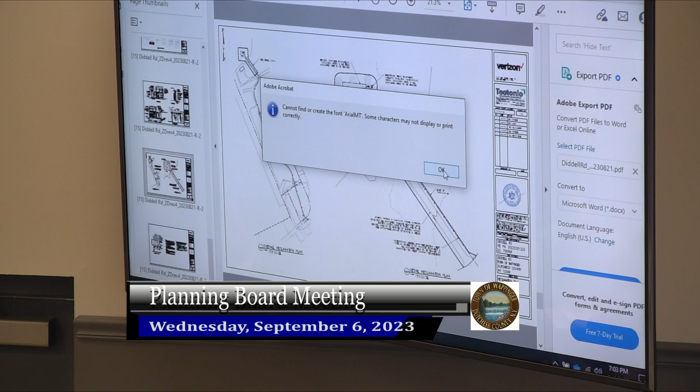So we've included those on the plans, which I'm having trouble finding, but it would be at the top of the tower. This is just some information from Flash Technology that shows you the beam and how it's projected outward. It's an FAA-approved light, and if it is required, that is something that we would use.

But I wanted to bring it to your attention because I think it complicates things a little bit, because under your code, the maximum height of a tower is that which can be operated without an FAA light. So we would probably have to go to the ZBA for a variance for that, again, if it was required.

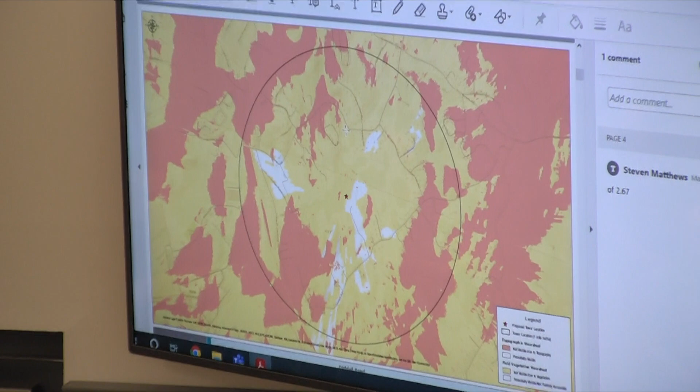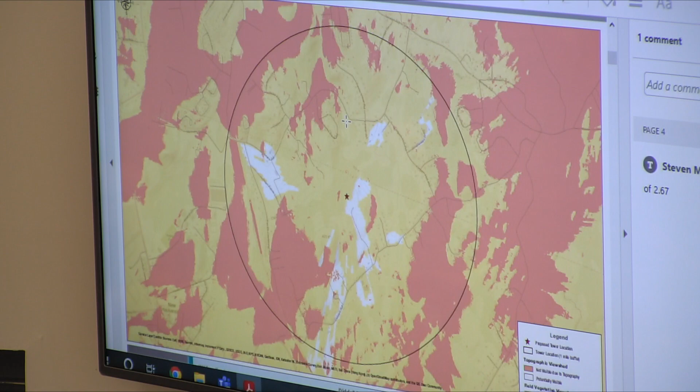The areas that are red and/or yellowish are areas that are screened by topography and/or vegetation. Obviously there's more screening in the summer months and less in the winter, but here we showed you what the leaf-off condition was. So this is more of a worst case type of scenario that we showed.

Okay. All right, any of the board members have any questions regarding this application? Not yet, no. Okay, all right.

Okay John, did you have anything with this one? No, they had addressed all our comments regarding the site layout. If the site does indeed change, we may have to relook at a couple of things, but okay.

All right, Jim, you have nothing right now? No, not... All right, okay, so this is an adjourned public hearing. I guess at this point, let's open up the floor for public comment, and then we'll go from there.

The only thing I would add is I think things are going to be adjourned further. We did the shot clock extension, I believe October 16th. We would just like to extend it further while we do this - if I could put a letter together like I did before, I could put it out until November, December, something like that. Yeah, that'd be great. Thank you, just administratively I want to make sure we don't run afoul of that.

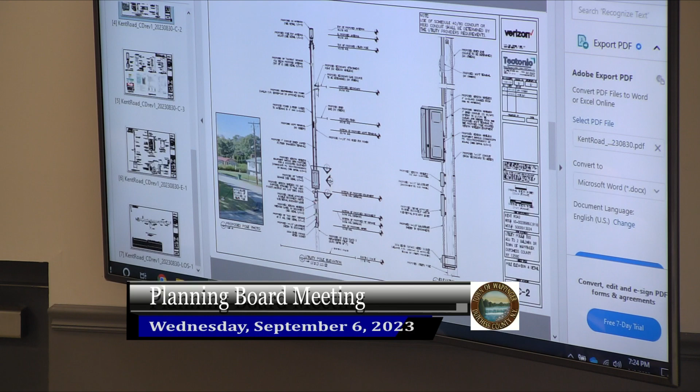So this is, I think, the easiest one we have for tonight. We submitted some revised plans. The only revision we did was to address, I forget which comment it was - the sight distance, the line of sight. So we did do that. It's the last plan, or second to last one here. So that's provided, I don't know that you can see it because I can't see it, but...

Sorry. Overall, this one has some pretty good sight distance. Sorry for whatever I just did. So that was like, I think, one of the biggest comments that was there. Weren't too many other comments. We tried to address that. Overall, we think it fits in with the surrounding network of utilities that you have. I don't think there are any major concerns with it other than the line of sight distance.

Well, first I'll start with the board. Does anybody on the board have any concerns with this application that haven't been addressed? No. Okay.

Malcolm, have you any open issues with this? No, currently I have no open issues. We spoke with the RF analyst earlier today. He also has no open issues with this application. There are no red flags in his report.

Okay, John? This was the one comment we had regarding this application, the line of sight. We just got the submission this evening, so I'll take a look at it tomorrow just to verify. But it looks like they provided what we asked for.

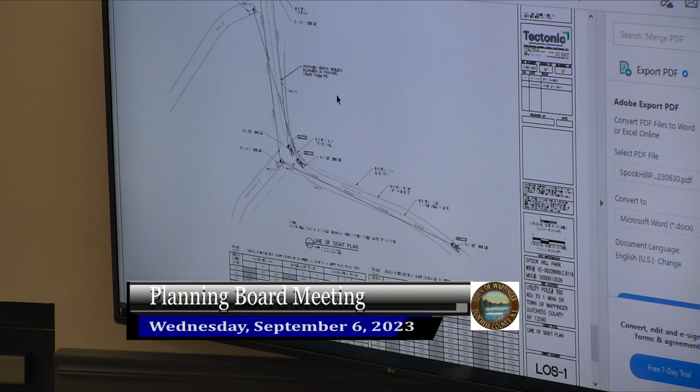That's what a lot of people said, they didn't want the pole to be there, so we can move it there. Should not be a problem for us at all. And we provided a line of sight also in the plans. So there's a line of sight. Obviously, you have a much different line of sight now by moving it the way we did. So, hopefully that's responsive to the planning board's concerns, and we think it addresses it to the best we could.

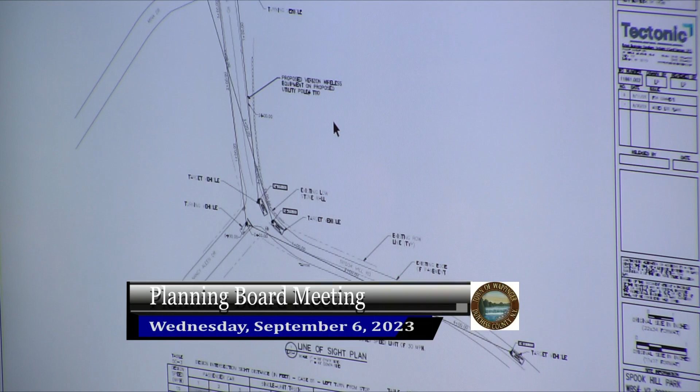We can't go too much further because we just have to be there. In fact, I think I saw an email from Mr. Johnson saying, is this okay for you to be there? I said, our engineer has said it's okay. He just didn't see plots for it. And I said, well, we're only 150 feet away. And I know that can make a difference, but if our engineer's okay with it, it should be okay. He seemed to be okay with that. Yeah, I think he was. I think everything was fine because it was same elevation.

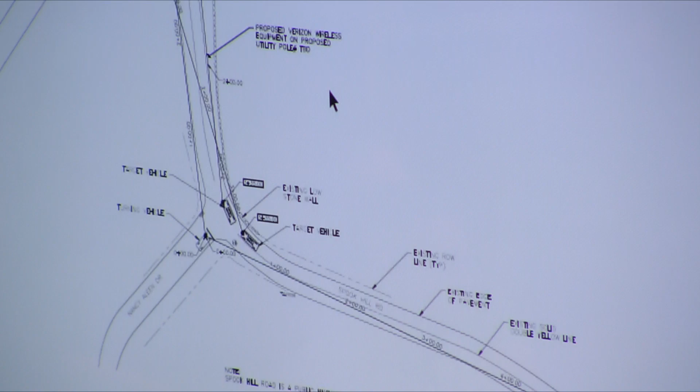Yes, with our discussion earlier with Bill Johnson, he had mentioned those items, that at least in his opinion, within that area, that would have been an acceptable site. And it shouldn't affect any of the signaling that was involved with that move. Exactly. But it just goes to show you that, for people not in the business, he was concerned initially, like, hey, you're only 160 feet away, and it potentially could affect it. The point is that these are such low power signals that it really is not a case where we can just put it anywhere and have it work. Right. But, anyway.

Right. The further you move it away from its original location, the less it's going to do for what you're trying to do to improve the service in the area. There was also, I remember him expressing that if they had been looking to move it to the east or southeast, that might have affected its service. But if anything, this is moving it in the right direction, closer to what it's trying to offload traffic from. Exactly, yep.

Okay. All right. Any of the board members have any questions regarding what's being proposed currently? No, because I took care of pretty much everything they were concerned about, the residents there. Yeah, as long as the residents are all right. Okay. All right, do you have no more comments on this? No, just to reiterate for the public, it's been moved across the street, across Spook Hill, and approximately 150, 160 feet north. It is no longer in somebody's yard or adjacent to somebody's yard. It looks like it's been moved farther away from residences, or at least the residents at that corner. But we'll see.

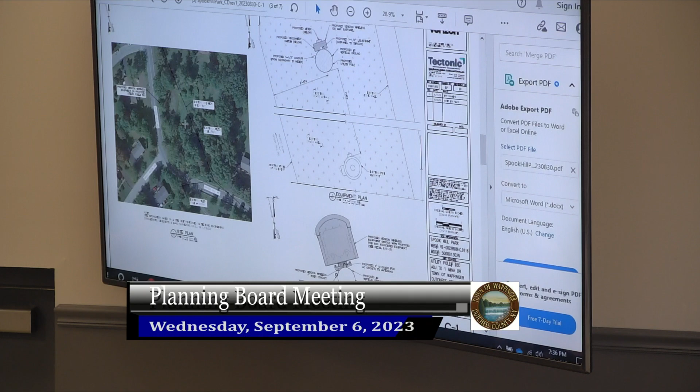Hi, everybody. I don't know, do we need this? Delia Engstrom, I was before you guys. Hold the microphone, please use the microphone. Yes, thank you.

Back in, should be on. I think in July, I supplied you guys with a bunch of pictures of our property. We live in the residence that will not be affected by the new location of the pole. We're at 21 Spook Hill Road.

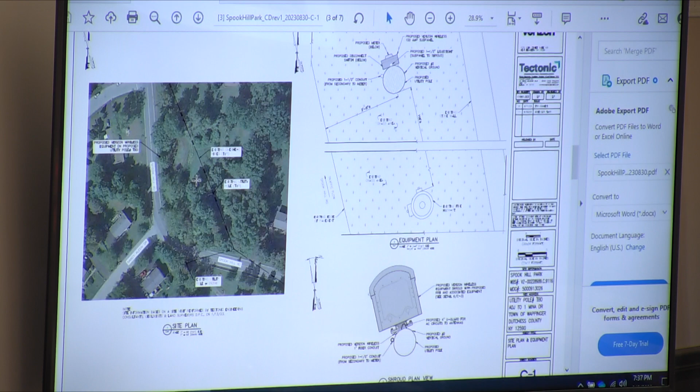You can kind of tell in this small visual that the proposed location of the pole did not move across Spook Hill Road. It is still on the same side of Spook Hill Road as it was originally proposed, just 150 to 200 feet farther north, directly in front of our pond. We have 4 acres of property, a 1700s-year-old farmhouse that we've been remodeling and taking care of, and now we've been rewarded with the potential of a cell phone tower next to our 300-year-old stone wall.

Before I get into any more of that, I'd like to address the fact that I had continually refreshed the website, and it looked like, and it was addressed tonight, that the agenda wasn't updated until maybe an hour and a half, two hours before the meeting tonight to show this information. I'm wondering if there's a protocol for that. It was kind of last minute for us to get this information. Is there any kind of guideline on when those things have to be publicized prior to the meeting?

Yeah, I mean, we did receive it today, unfortunately. It was just something, at least the board did. We received it on Friday due to the holiday. I was on vacation, and we got it on, so yeah, it was delayed due to vacations and things like that. That's fine, well, we just, we tried to be very transparent there.

To be honest, with the location, what's the concern with the current location? When we exit our driveway, we are now the only individuals impacted by this, because that is our left-hand turn, our left-hand view towards this turn to see oncoming traffic. This is the area that we mow weekly, more than weekly, to maintain and cut back vegetation along the turn - a cell phone tower located in the middle of the property that we maintain.

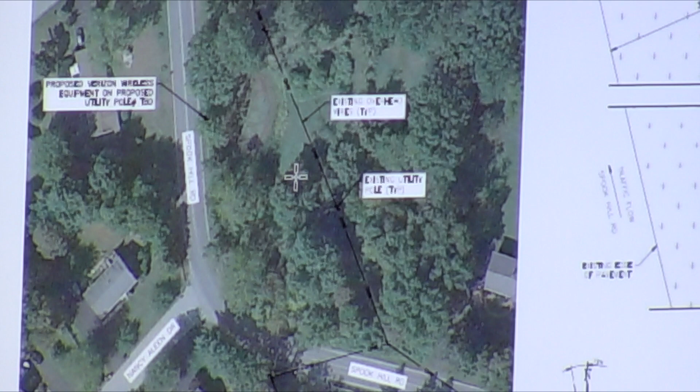I guess it's been addressed in their discussion regarding the possibility of moving it closer to the name that keeps being used for the project, which is Spook Hill Park. You could just call it 21 Spook Hill Road at this point, because that's where it's located. We have an easement, as you can see, the black line that runs at an angle diagonally through our property. It was recorded with the Dutchess County Clerk on June 7th, 1957, granting an easement of 20 feet on either side of the poles for utilities.

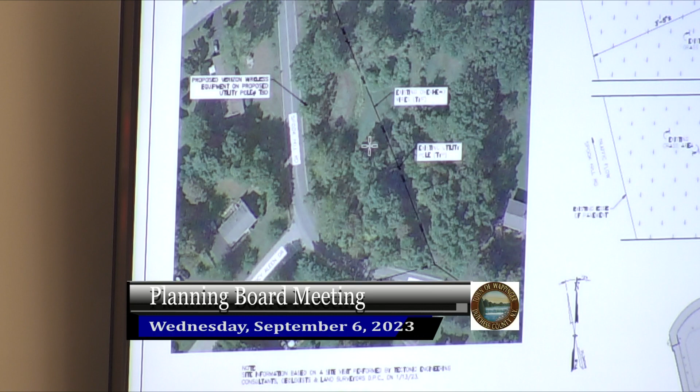They come out at the other side of our property, on the other end of the turn. I know they addressed the fact that that was not a good location. I think my husband Jason is going to speak to our questions regarding what the wiring will look like. It sounds theoretical, like there being wires, but I would like to know where they're going and what that's going to look like. So I'll let Jason speak to that.

Good evening. Our biggest concern right now is, of course, what Delia said, the line of sight. Just the other day I was coming out of my driveway, I looked left towards the corner, clear as a bell. As soon as I took one foot into the road, I looked and there's a car right on me. That's what we're dealing with every day trying to get out of there. That pole is just going to impact us more. That corner is a very dangerous corner. They say the line of sight's going to be good - we just disagree with that completely.

Even for the cars on the other side heading towards that corner, they're still going to be impacted by that pole. We really just want to know - the engineer said there's utility lines on the other side, there's utility lines on this side, there's utility lines on Nancy Aleen.

That whole corner has utility lines. That's not really an excuse. There's no reason why that couldn't be just on the southeast of that corner where there wouldn't be any impacts to visibility. Because if a car's traveling west and then north, a pole on their right side is not going to impact them that much because the traffic's on the other side of the road. Same with coming the other way. So the southeast location to us seems to be the most safe.

And it's already set back about 15 feet from the road versus 25. Yeah, there's plenty of room to tie in, especially tying into the electric, since the electric poles are on that side. They can tie right in instead of bringing another set of lines across the road.

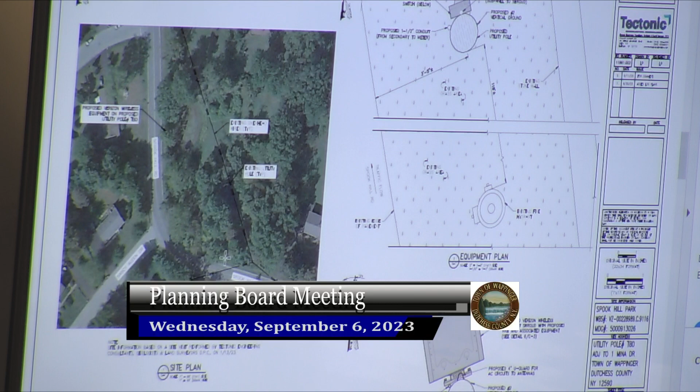So there's poles on that side. This is where the lines come across and then cross the street. This is the park over here. I'm saying right here. Okay, we got a little too much going on here right now, it's getting a little confusing. Take a look at it.

I just wanted to address you guys and let you know our concerns and ask that it be further reviewed.

Okay, well maybe when we get done, maybe you can speak to the applicant outside. Yeah, we'd be happy to do that, maybe hash things out. Yeah, and then maybe they can explain to you the locations where it can and cannot go. I understand the issue with the overhead wires, but you guys are the deciding body, not them.

Right, no, correct. And you could discuss it with them, maybe they can look at it or explain it to you. Maybe there's an alternate location, maybe not. Again, they're doing something to try to achieve an objective.

But they did move it, listening to everybody's concerns. And now we have a concern for this location. It's still on our property- well, I mean, it's obviously not on your property.

It's not on your property, it's in the public right-of-way. Just so we can be clear, because if it was on your property, they would have to turn around and get an easement from you in order to put it there. Right, just to go back to those two points, sir, that's really what we're trying to get at.

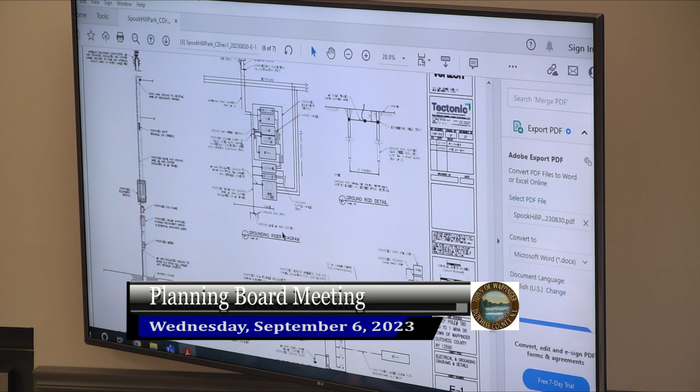Use the microphone if you're going to speak. Verizon Telephone will be putting the pole, and it's sourced from the exact same places that all utility poles located in and along the Spook Hill right-of-way and other right-of-ways in your town are sourced from. They're the same things, and they probably have less equipment on them than your 3-gang transformers spaced throughout the town center. It's really not much of a difference, but we will continue to try to work.

If we can work through it and get a location, I guess we can revisit this. So do you want to put this off to October 16th? I guess we have to. Okay.

In the interim, the quicker you can get us a little something, we can run it by the RF engineer as well. The quicker we get the information, we can get it to him so that we can get back to everything. I'm going to ask the board, with this application, do we allow the applicant's engineer to reach out to our RF engineer on this application as well, to discuss issues in between meetings? If everybody's in favor of that, I just wanted to make sure. No objections? Good, so that way they'll just kind of keep the process moving.

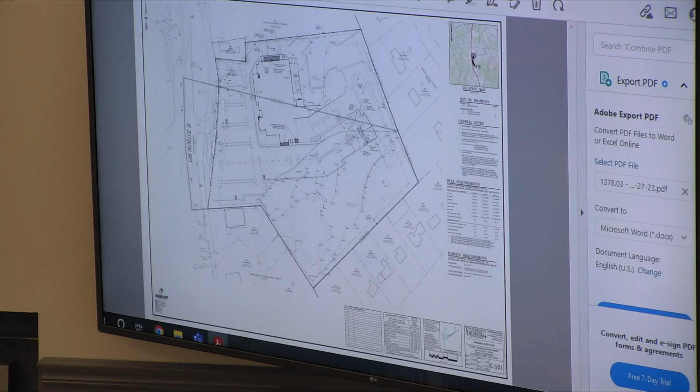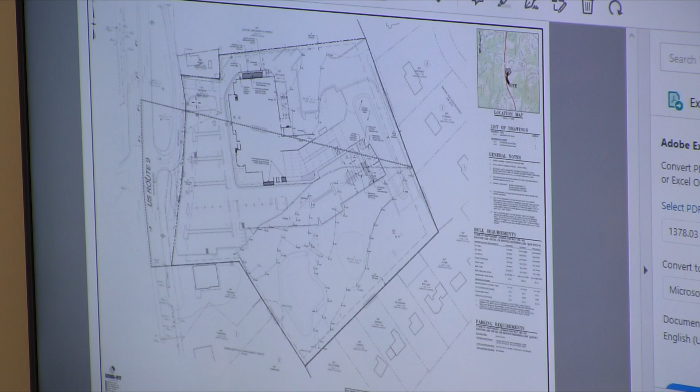Okay, so a brief project narrative has been distributed, and we also did the conceptual a little while back. Adams is proposing to renovate and create a proposed cooler expansion on the north elevation of our building on Route 9. Also on the south side, enclosing 2 exterior covered areas that are now under cover to allow for minor interior expansions, approximately 1,500 square feet of additional floor space in the building. The plan also includes elimination of 11 parking places, and that's been corrected, we'll get into that in a moment. 11 parking spaces will be eliminated on the north side, and 23 added to the southeast side.

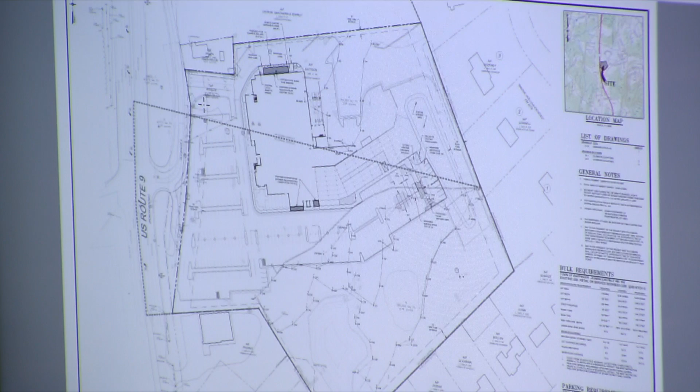The Adams are in receipt of the SEQR letter from Dutchess County Health Department, which takes no objection to the planning board serving as lead agency. I believe H&H also followed up with a comment that the application is considered Type 2, no further SEQR actions required. The project, again, from the Department of Health, appears not to require health department approvals. We also received Form 239, the standard form from Dutchess County Planning Department.

They have no comments that we're aware of. Review letters were also received from CPL and H&H. Unfortunately, our site engineer from Engineering Surveying Properties, Jay, could not be here tonight. We've had conversations with him throughout the day, and we received these review letters today.

We'd like the opportunity to share his preliminary responses tonight. I think it'll clear the air on a couple things, or at least let us know what needs to happen further, and then that would be followed by his formal responses.

One of our goals tonight is to respectfully ask the planning board to consider a motion to draft a resolution for amended site plan approval at next month's meeting, if possible, of course subject to Engineering Surveying Properties' formal response and addressing the town engineer's or planner's comments. Adams will also have to pull a wetland permit, which we're aware of per the comments.

We would also ask if the board would respectfully consider formally waiving a public hearing, if that were a possibility.

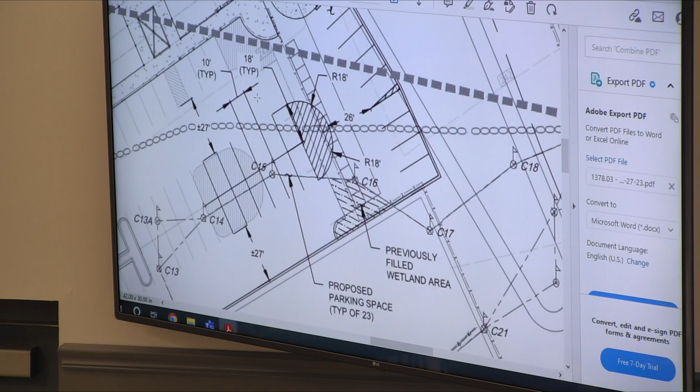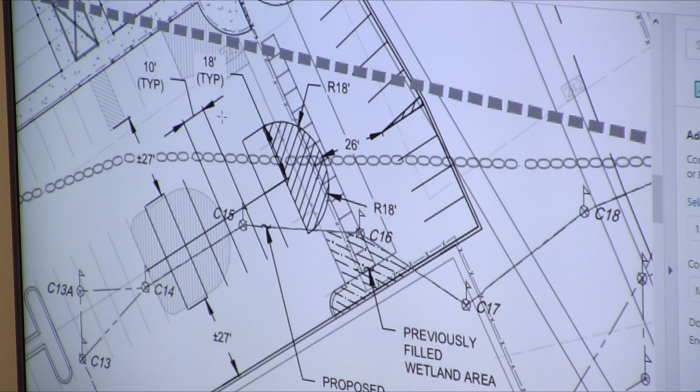In that revised case, since the design of that end island and striped area is changing, can you make a note of the largest size truck that's going to be moving through there and provide a truck turning template? Demonstrate that this new design meets design standards for normal car parking in that area, but if trucks are going to be moving through there regularly, let's make sure that's not going to be an issue.

So just let us know what the size is going to be, and then put a truck turning template on there showing their standard maneuverability, how they're going to come in, access where they need to, and turn around and come back out.

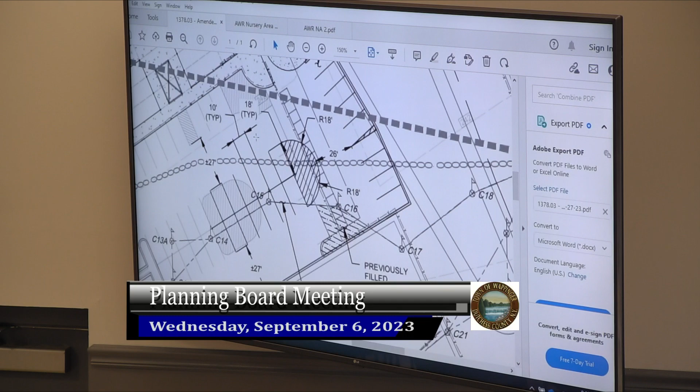Noted, thanks. Wetlands, understood, Adams will obtain the required permit. So as far as the preliminary responses to the comments, Jay from Engineering and Surveying Properties would formally submit a response if the board would so consider.

And again, we're respectfully asking if you would consider drafting the resolution, maybe to be voted on at the next meeting. We're appealing, it would really help our schedule coming into the holidays, since we're already an operating retail outlet. If consideration could be given.

Yeah. I mean, the bigger question is, how quick is the engineer going to get all this stuff put on paper? We're confident we can submit by September 11 to make the October 2nd meeting.

In which case, if the resolution for an amended site plan was drafted and ready to go, it would not require us to go to the following month. And we're asking respectfully, subject to the engineer's formal responses and our pulling the permit.

Okay, because with the relocation of the hydrant, there was one other issue that didn't get addressed, which is the Fire Prevention Bureau needs to at least agree on that relocation. So the quicker you can get the plans, the fire inspector can maybe get that resolved prior to the next meeting, just to confirm it's a good location or not.

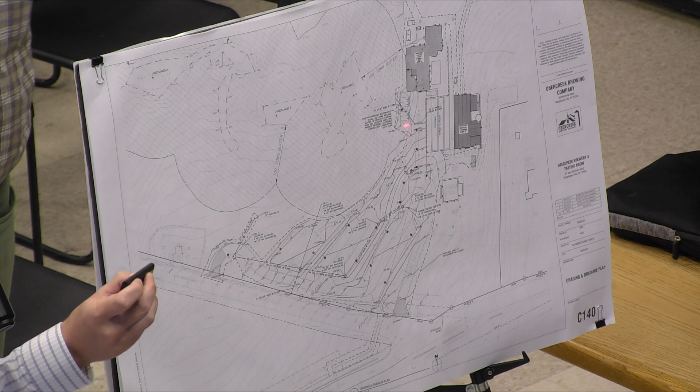So the fire hydrant was located along the drop-off loop. The fire chief would like to see two fire hydrants, so we'll be shifting one down towards the tasting room and then providing another fire hydrant south, closer to the existing farm stand. Besides that, he had no other concerns.

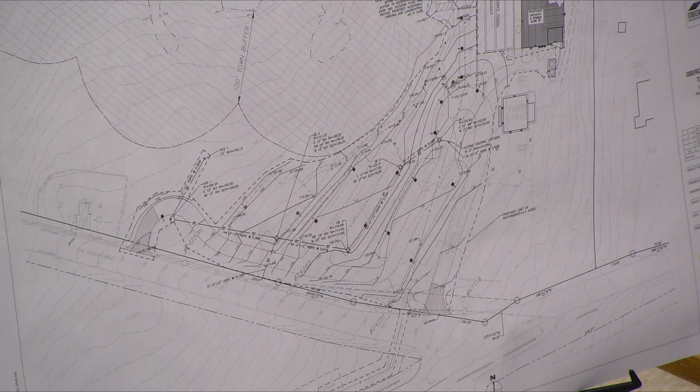The Fire Prevention Bureau also reviewed the plans. They had no concerns. And we've also received comment letters from CPL and H&H. So I don't think we need to go through all the items, but the long and short of them, largely technical comments that we read through. Nothing major, no issues.

I would like to speak with John a little bit in the next coming days about some of the SWPPP comments, just to make sure we're on the same page on that. And I know there was one comment about traffic that I'd like to discuss. Yeah, we talked about that before during the workshop. And since Malcolm's office is in agreement that no traffic study should be required, then that comment goes away.

So that's about it, but any questions you guys have, we would love to answer. And we're hoping the next step, the public hearing, we can get that scheduled tonight as well.

Okay, any questions we could do? You guys, any of the board members have any questions before we move on? We looked it over, we didn't see anything really. It all looks pretty good. Okay, all right.

Malcolm, you have anything at this point? I mean, we can, I can go through my memo. I discussed it with you. There's one technical one about the parking lot. I'm not sure if you've reached a conclusion on that or...

We have not, but we will be making sure that we're going to show essentially dashed lines for what a conventional parking stall would look like. Obviously, since it's gravel, it won't be striped that way, but just so planimetrically it displays and demonstrates the correct widths. Yeah, I think that's the easiest solution.

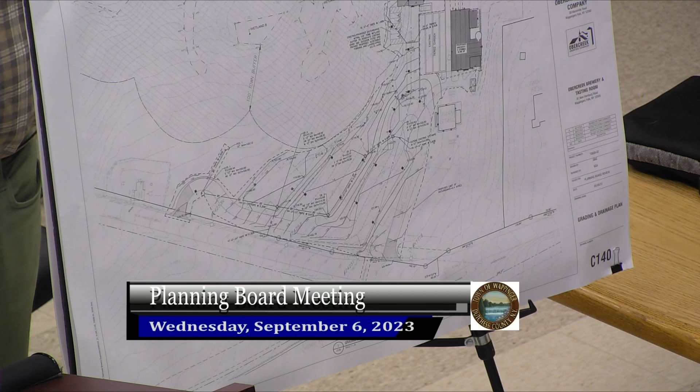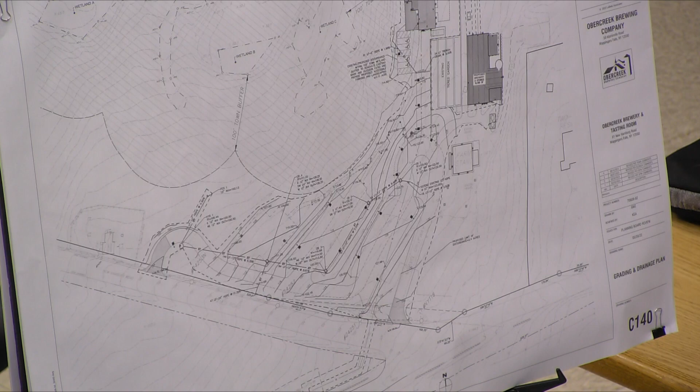But also within the buffer overall is an existing farm field. So we don't really want to be placing boulders within this field that are going to get run over by tractors, and I don't think you need to. I don't. We discussed this in the pre-meeting. You're showing them where we would want to see them, sort of as curb stoppers in that parking area.

Right, yes, but it's an active farm field, it's in the ag district. Yeah, we're, you don't have good reason to mark it out. Yes, it's not required to be put in. Perfect. So yes, glad I remembered that.

But there's nothing else, specific comments that I don't think we have a good answer to and response to in the next submission. Okay.

Okay, all right, so I guess basically it looks like we have to move it forward, I guess we'd have to schedule a public hearing. I guess that would be the next step. So, B, what would be the next? October 2nd? October 2nd, maybe? October 2nd would be, so is October 2nd, would that work?

So would you be looking for a full resubmission by the 11th? Because that would be the only potential hang-up, specifically with the SWPPP comments. There may be some additional soil testing involved with that, so we can push that off. How much of the comments do you think we want a full resubmission prior to that? Not for me, but for John, potentially. John, for the purposes of opening a public hearing, I don't think they need to have every single item addressed. Right.